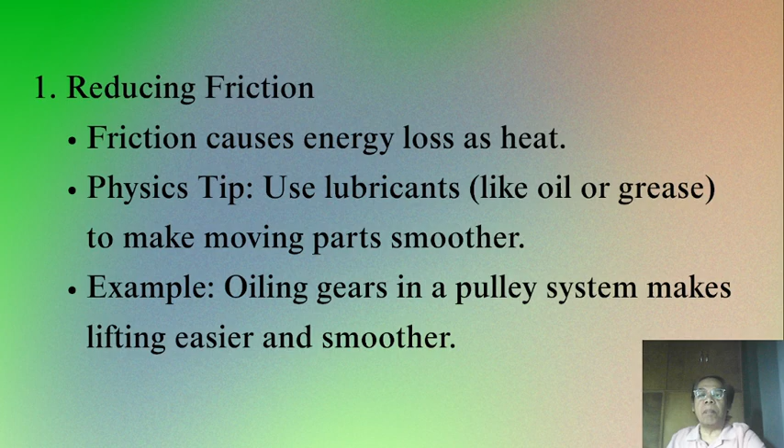Basic principles that improve efficiency. Number one, reducing friction. Friction causes energy loss as heat. Physics tip: use lubricants like oil or grease to make moving parts smoother. Example: oiling gears in a pulley system makes lifting easier and smoother.

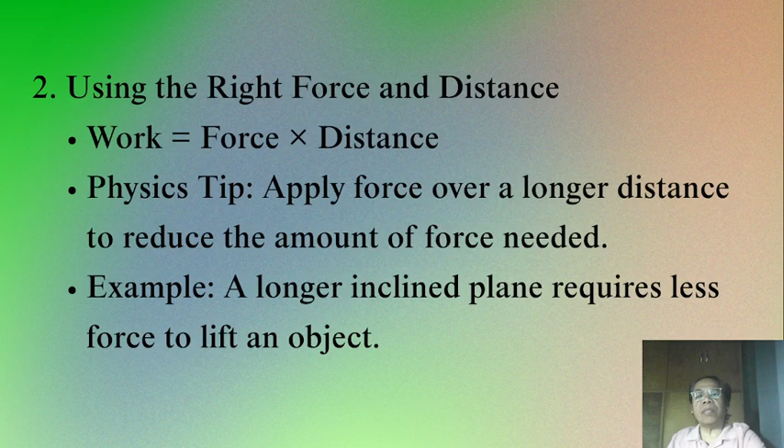Number two, using the right force and distance. Work equals force times distance. Physics tip: apply force over a longer distance to reduce the amount of force needed. Example: a longer inclined plane requires less force to lift an object.

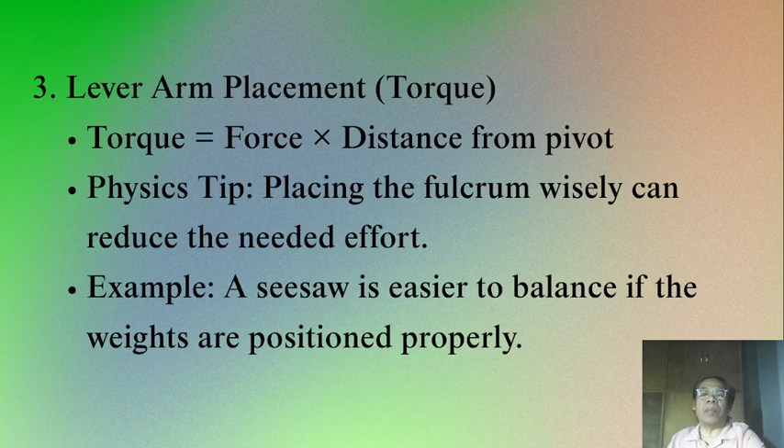Number three, lever arm placement, torque. Torque equals force times distance from pivot. Physics tip: placing the fulcrum wisely can reduce the needed effort. Example: a seesaw is easier to balance if the weights are positioned properly.

Number four, better materials means less resistance. Physics tip: use strong but lightweight materials for machine parts to minimize energy loss. Example: a wheel made of rubber or smooth plastic reduces rolling resistance.

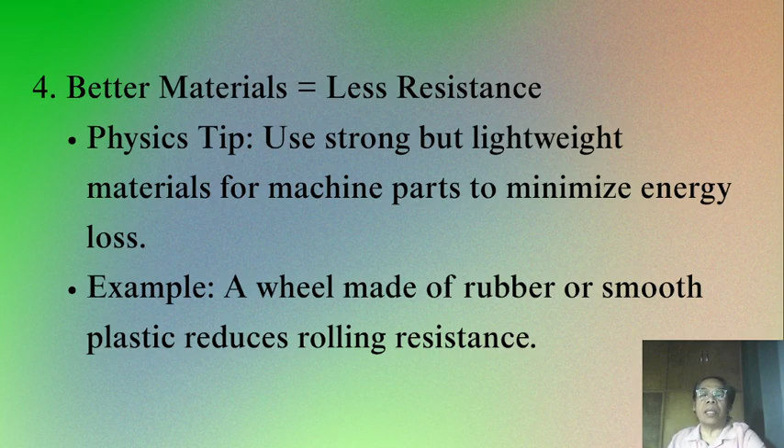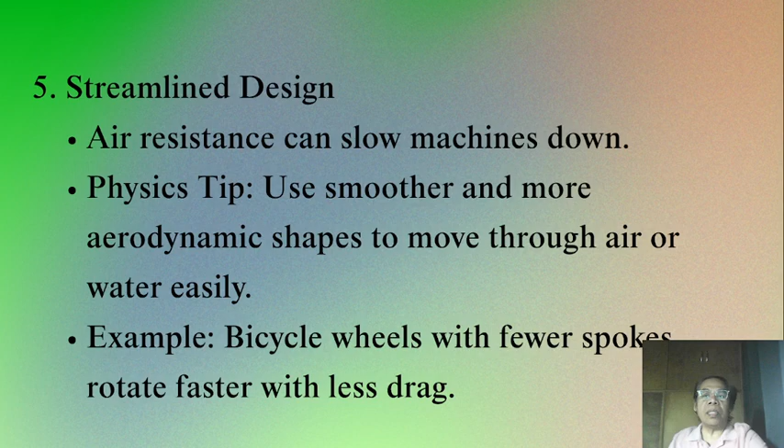Number five, streamlined design. Air resistance can slow machines down. Physics tip: use smoother and more aerodynamic shapes to move through air or water easily. Example: bicycle wheels with fewer spokes rotate faster with less drag.

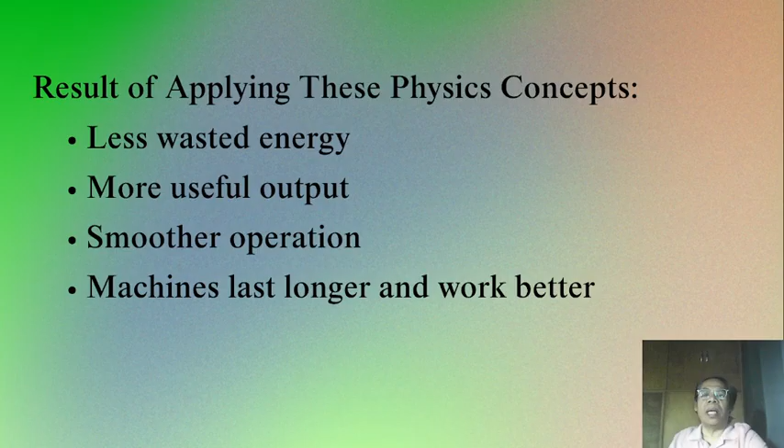Result of applying these physics concepts: less wasted energy, more useful output, smoother operation, and machines that last longer and work better.

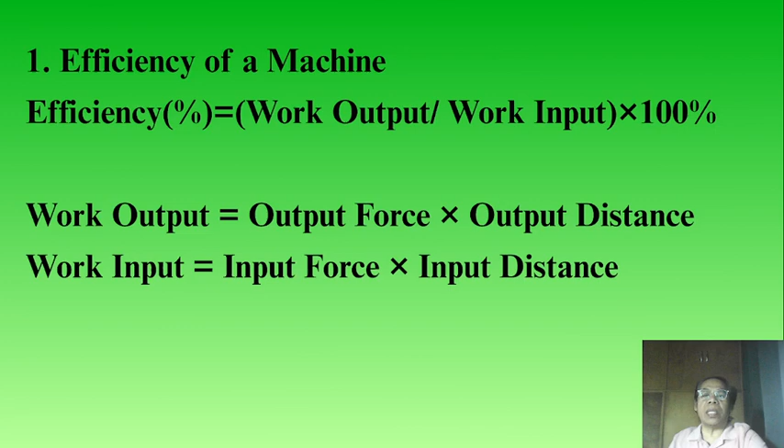Formulas. Number one, efficiency of a machine. Percent efficiency equals work output over work input times 100%. Work output equals the output force times output distance. Work input equals the input force times input distance.

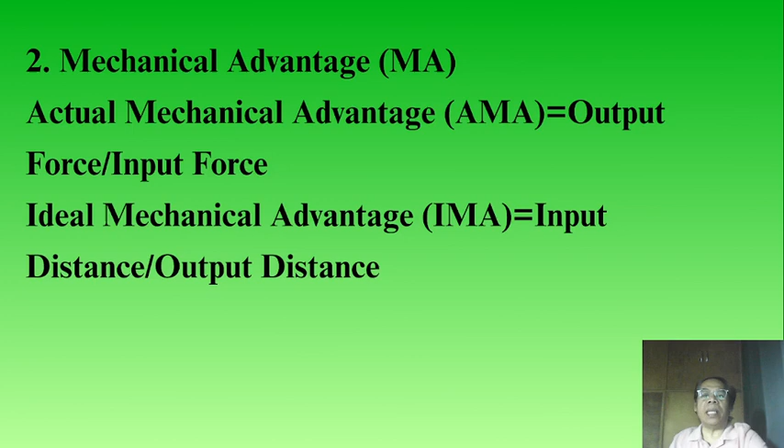Number two, mechanical advantage. Actual mechanical advantage equals output force over input force. Ideal mechanical advantage equals input distance over output distance.

Number three, relationship between efficiency and mechanical advantage. Efficiency equals AMA divided by IMA times 100%.

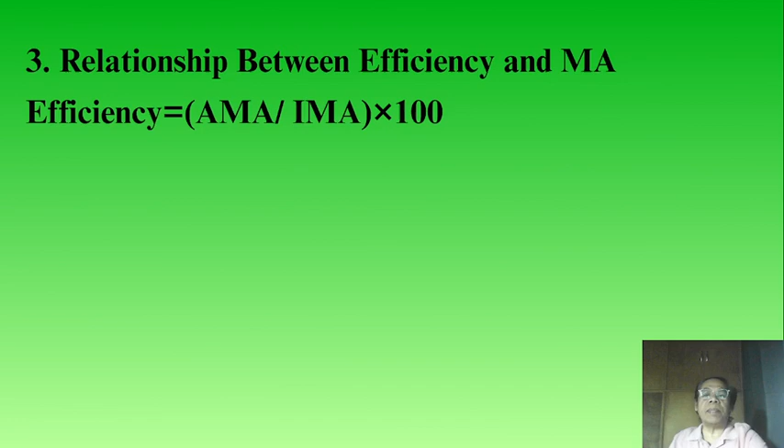Number four, torque for rotating machines. Torque equals force times the lever arm, the distance from the axis. Number five, force and work. Work equals force times distance.

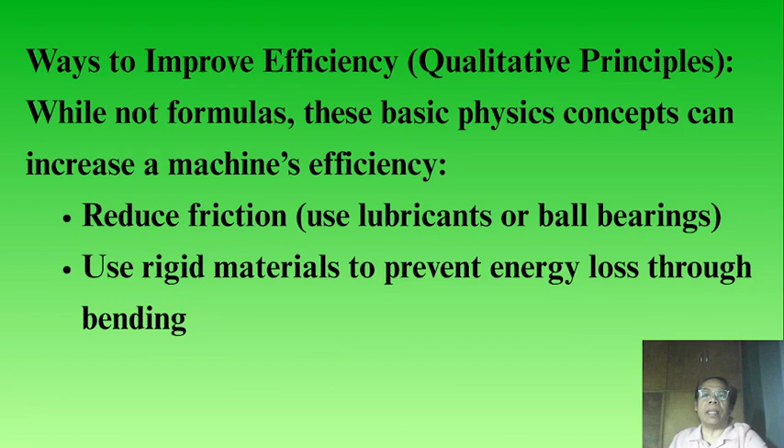Ways to improve efficiency, qualitative principles. While not formulas, these basic physics concepts can increase a machine's efficiency: reduce friction, use lubricants or ball bearings, use rigid materials to prevent energy loss through bending, minimize air resistance where applicable, optimize input and output distances in machine design, and use pulleys, levers, and gears strategically to multiply force with minimal energy loss.

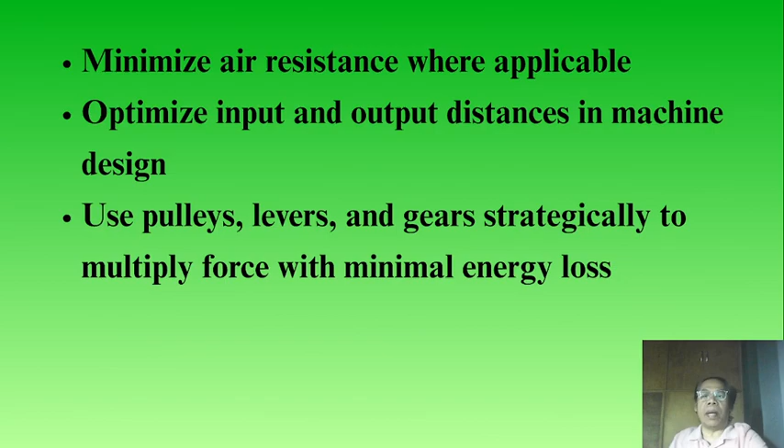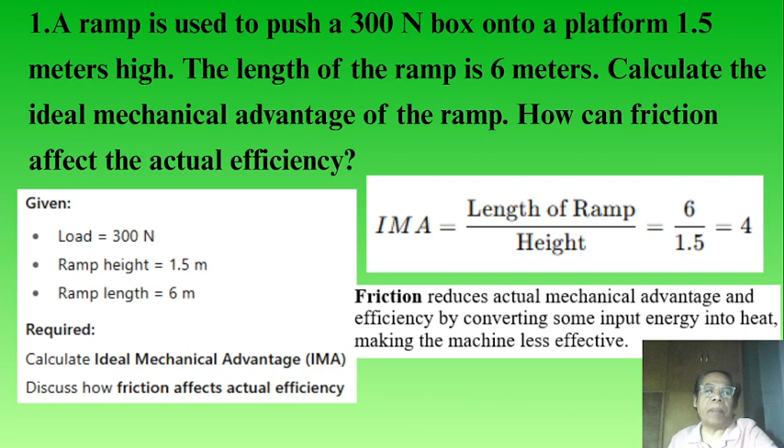Practice problems. Number one. A ramp is used to push a 300 Newton box onto a platform 1.5 meters high. The length of the ramp is 6 meters. Calculate the ideal mechanical advantage of the ramp, and discuss how friction can affect actual efficiency. Given: load 300 Newton, ramp height 1.5 meters, ramp length 6 meters. Required: calculate the ideal mechanical advantage and discuss how friction affects actual efficiency.

IMA equals the length of the ramp over the height. Substitute the given data and you'll get an IMA of 4. Friction reduces actual mechanical advantage and efficiency by converting some input energy into heat, making the machine less effective.

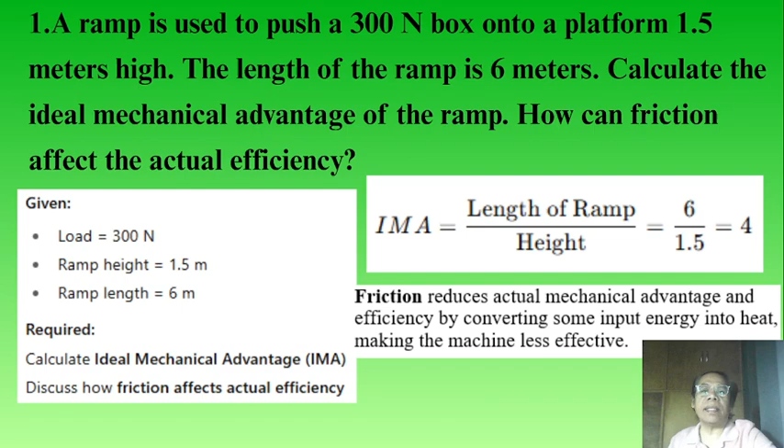Number two, a pulley system is used to lift a 500 Newton load to a height of 2 meters. The user pulls 4 meters of rope using 300 Newton of force. Calculate the work input and the work output, then explain how the pulley system might be improved to reduce energy loss. Given: load 500 Newton, height 2 meters, input force 300 Newton, distance pulled 4 meters. Required: calculate the work input, work output, and suggest improvements.

Work input equals the input force multiplied by the distance pulled. Substitute the given data, you get 1,200 joules. Work output equals the load multiplied by the height, which is 1,000 joules. Efficiency can be improved by reducing friction, for example, lubricating pulleys or using smoother ropes.

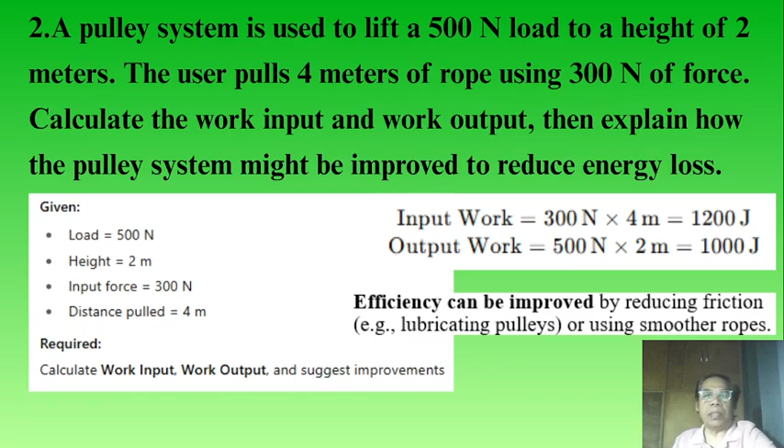Number three, a person uses a lever with an input arm of 1.2 meters and an output arm of 0.3 meters.

If the person applies 80 Newton of force and lifts a 200 Newton object, calculate the actual and ideal mechanical advantage. Suggest 2 ways to increase the efficiency of the lever. Given input arm 1.2 meters, output arm 0.3 meters, input force 80 Newton, the load 200 Newton. Find the AMA, the IMA, and suggest ways to increase efficiency.

So IMA is input over output, and substitute the given data, the answer is 4. AMA is equal to the load over the effort. Substitute the given data, you got 2.5. So, to improve efficiency, you need to reduce friction at the fulcrum and use longer input distance.

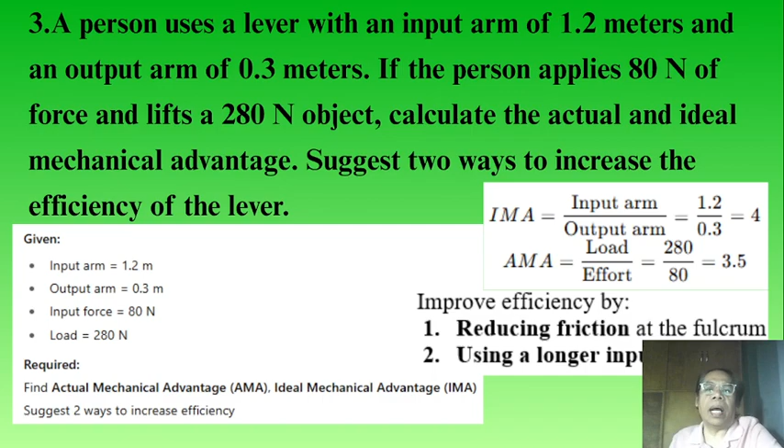Next, number 4. A wheel and axle has an input work of 1,000 joules and an output work of 850 joules. Compute the efficiency of the system. What physics principles can be applied to reduce the energy loss? So, given input work 1,000 joules, output work 850 joules, calculate the efficiency and suggest principle in reducing energy loss.

Formula to use, efficiency is equal to the output work over the input work times 100. Multiply it, substitute the given data, you will get 85%. Okay, suggestion, apply the conservation of energy to reduce friction and using lubrication.

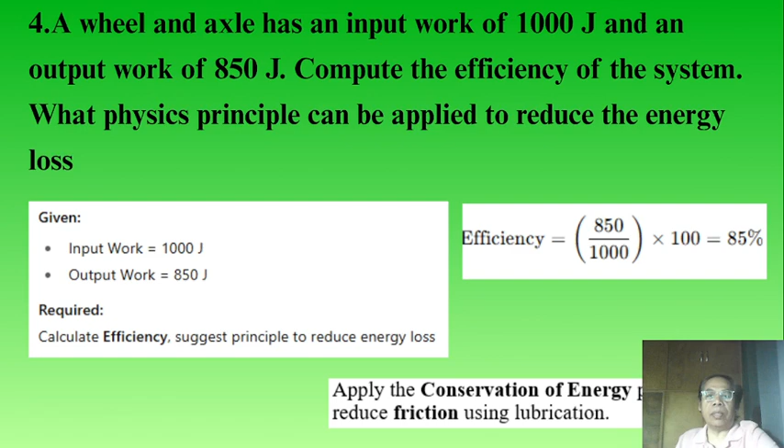Number 5, a screw jack has an input force of 150 Newton applied over a circular distance of 1.5 meters and lifts a 600 Newton load over a height of 0.1 meter. Find the ideal mechanical advantage and identify sources of energy loss and suggest improvements. Given input force 150 Newton, circular distance 1.5 meters, output force 600 Newton, height lift 0.1 meter.

Calculate the IMA, and then identify energy losses and suggest improvements. So IMA is equal to input distance over the output distance. Substitute the given data, you get 15. Energy loss due to friction and heat between screw and threads. Improve by lubricating threads and reducing the unnecessary force.

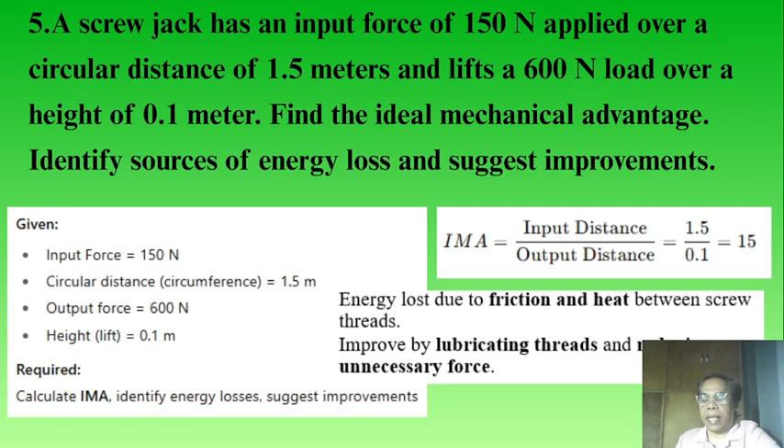Number 6, a block and tackle system lifts a 1,200 Newton object using a rope, and the object is raised 2 meters. Compute the efficiency, and how does using lubricants on the pulley increase system performance. So given 1,200 Newton, input force 400 Newton, distance pulled 6 meters, height lifted 2 meters.

Calculate efficiency and also the effect of lubrication. So the input work is equal to 400 times 6, which is equal to 2,400. Output work is 1,200 times 2, you have 2,400 joules. And then the efficiency is output work over the input work. Substitute the calculated values, the answer is 100%. So, lubrication reduces axle friction, improving performance and extending system life.

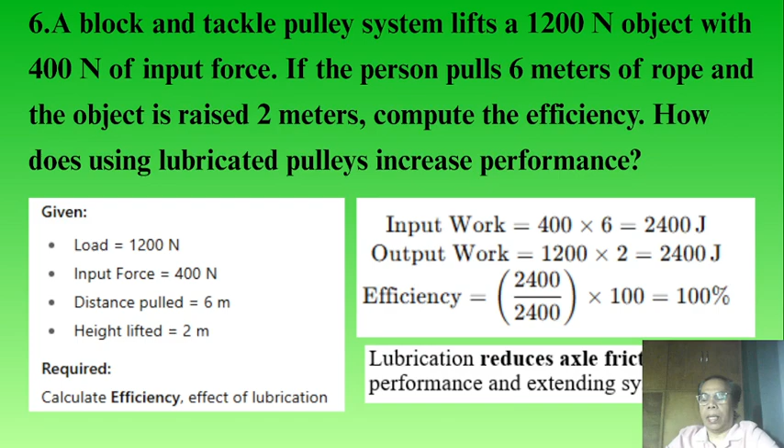Okay, so number 7. A worker uses a wedge to split wood. The input distance is 30 centimeters and output distance is 5 centimeters. Calculate the ideal mechanical advantage, then explain how sharpening the wedge can improve the system's efficiency.

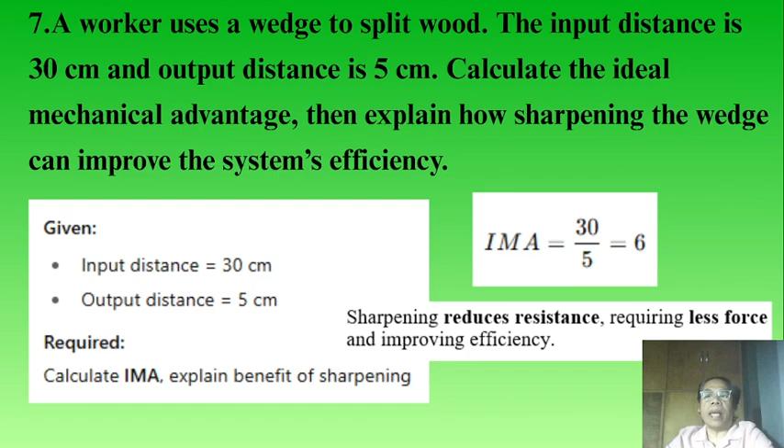Given input distance 30 centimeters, output distance 5 centimeters, calculate IMA and explain benefit of sharpening. Okay, use the formula IMA is equal to input distance over the output distance. Substitute the given data, the answer is 6. Sharpening reduces resistance, requiring less force and improving efficiency.

Number 8, a car jack has an input work of 300 joules and outputs only 180 joules of useful work. What is the efficiency? What are two ways the jack's efficiency could be improved using the basic physics concepts? Given input work 300 joules, output work 180 joules, calculate efficiency, and then suggest improvement.

So efficiency formula is the output work over the input work. Substitute the given data, you will be getting 60%. And then improve by lubricating moving parts and reducing friction, and using lighter materials to reduce energy waste.

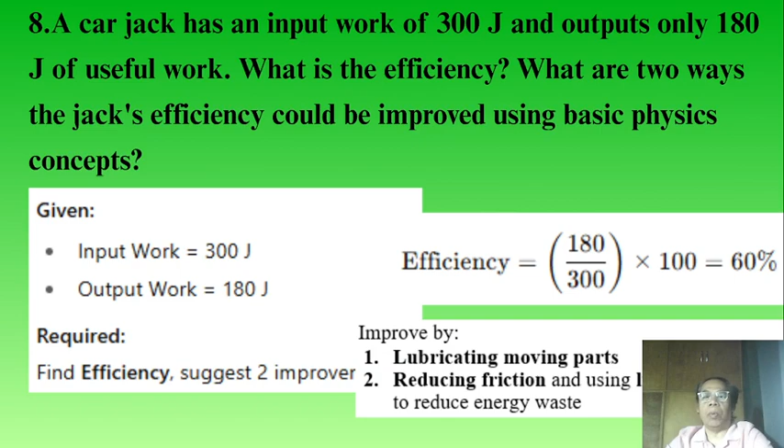Number 9, a gear system transfers motion from a small gear with 10 teeth to a large gear with 30 teeth. What is the mechanical advantage of the gear system? Explain how gear ratio selection can affect both speed and efficiency. Given small gear teeth 10, large gear teeth 30. Required the MA and explain the gear ratio effect.

So use the formula MA is equal to teeth on large gear divided by the teeth on small gear. Substitute the given data, you got 3. Higher gear ratio increases force but decreases speed. Selecting proper gear ratio balances speed and power.